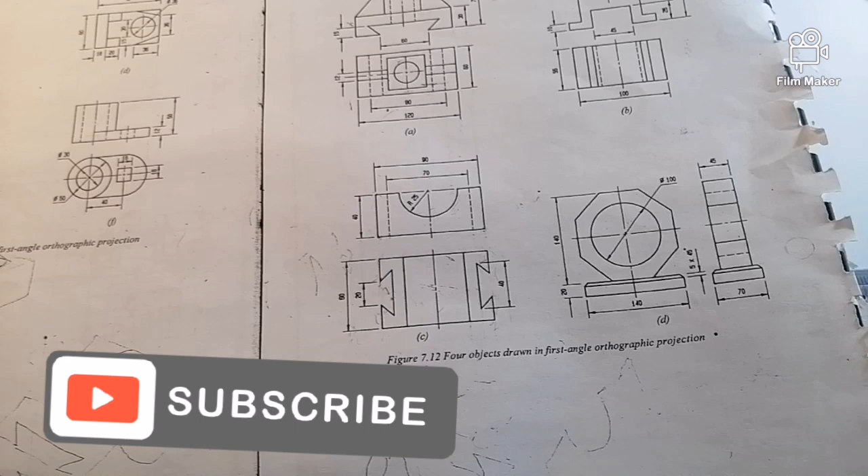Let us do D. Yesterday night we did C. So I think you understood. If you couldn't understand better, just let me know in the comments. So let's attempt it.

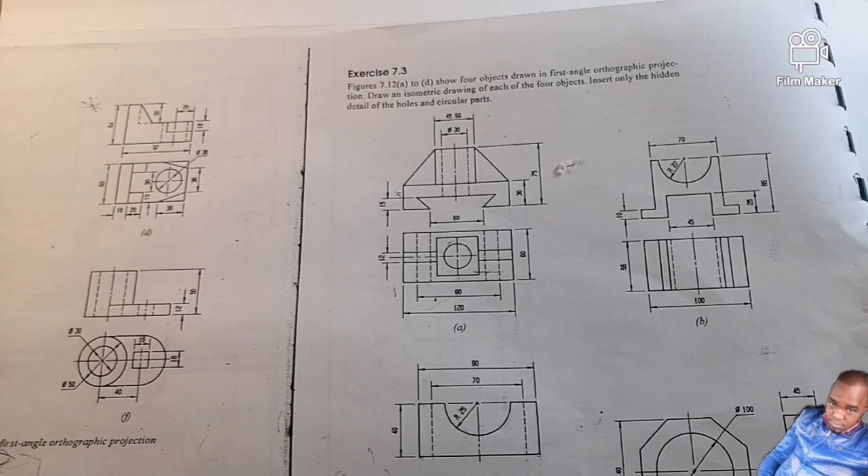So the question, I'm actually taking this right from the engineering textbook, Engineering Drawing N2 textbook. So we read the question. This is exercise 7.3. These views are given in first angle orthographic projection. So let us attempt D. So this is D.

Let's analyze the views. If they are given according to first angle orthographic projection, without fear or favor, we know this is front, this is left. What is not there is the top view, but using dimensions of the left view we can get the top view, because the left view and the top view always share the same width or breadth, and the front view and the top view always share the same length. Okay, let's go.

The very first step: draw a horizontal faint line without dimension. Then from there, draw a line that's going to be perpendicular. Remember, I said it's always advisable to start your isometric bottom down, so that you have enough space for your isometric this side. So here we go. You have to be careful.

Right. So the very first thing here, let's get the base. This is the base, and when you check, we can say this is a cup, like an athletic cup, because you must have a light on what you are drawing. Let's say this base is made of wood, then this one is made of diamond or gold. So now let's get the base.

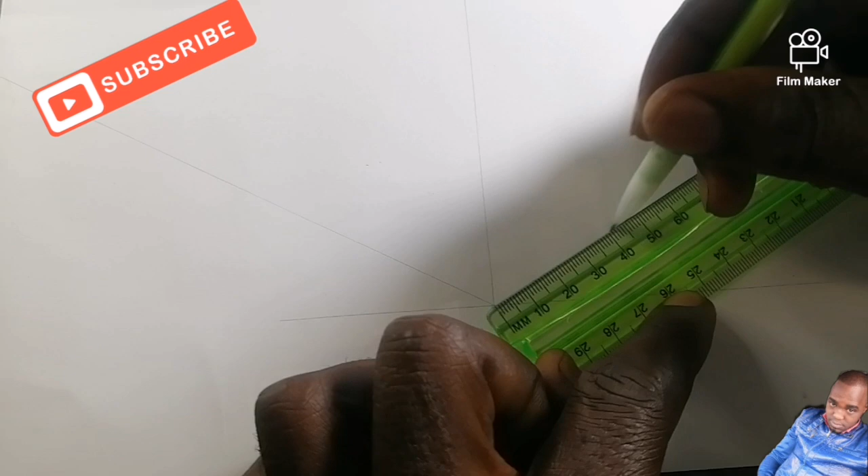From here till here is 140. Measure 140 from here. 140 is there, and you have to be careful. 140, you can draw it dark. Two lines are not allowed, so you must erase it. Understand? So let's erase that.

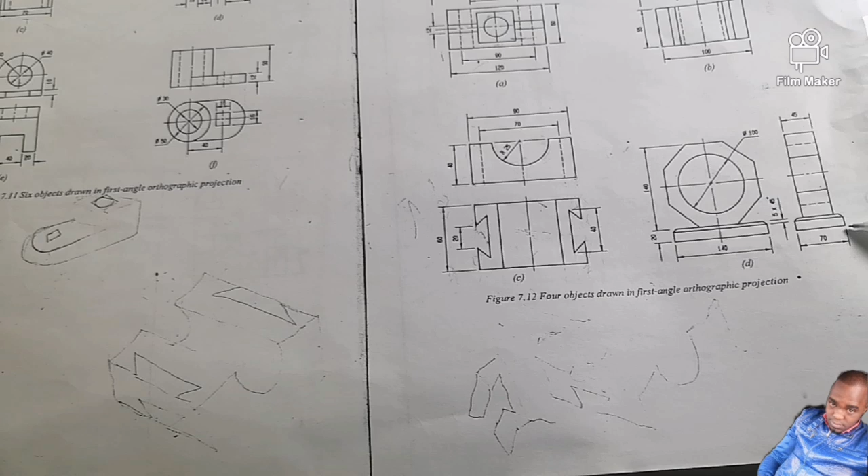After 140, get a line that is going up, faint, like this. I hope you see it. After the 140, let's come to our left view and get this 70. We said we are starting with the base of our cup. From there till there is 70, which means I am measuring 70 here.

70 from here till here. Where your 70 ends, go up faint. Then what is happening? After the 70, we have a height of 20 millimeters. So from there till there, measure 20 millimeters.

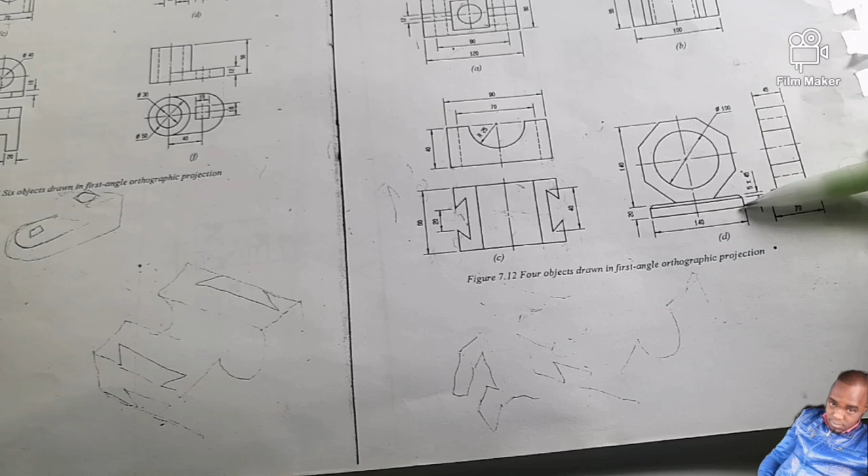There is our 20 ending, but double check. The 20 millimeters is from here till there. Then going back is 5 millimeters. So where your 20 ends, go back with 5 millimeters. Now from there, get a faint line for now, because you don't know what is happening there. Faint line like this. Are we together?

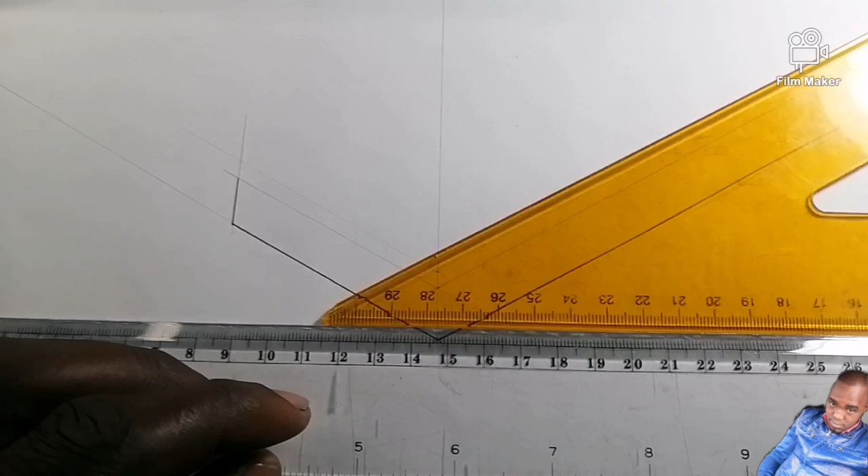Now I can draw this one solid or dark. Let me also get the constructional line where the 20 ends. Faint. Pull your pencil. Now this line I can erase; it's no longer helpful. Then let's close our base where the 5 ends. Remember, from here till here is 5 millimeters. There you go.

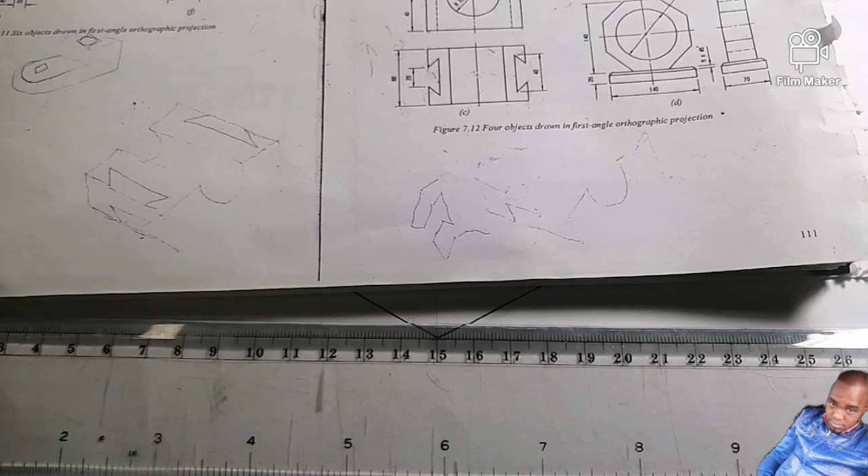Then what is happening? Come back here. From here till here we must use an angle of 45 degrees. Yes, from here till here is 5, but these lines are at an angle of 45 degrees. Bring your 45. Now draw a solid line from this corner to this one.

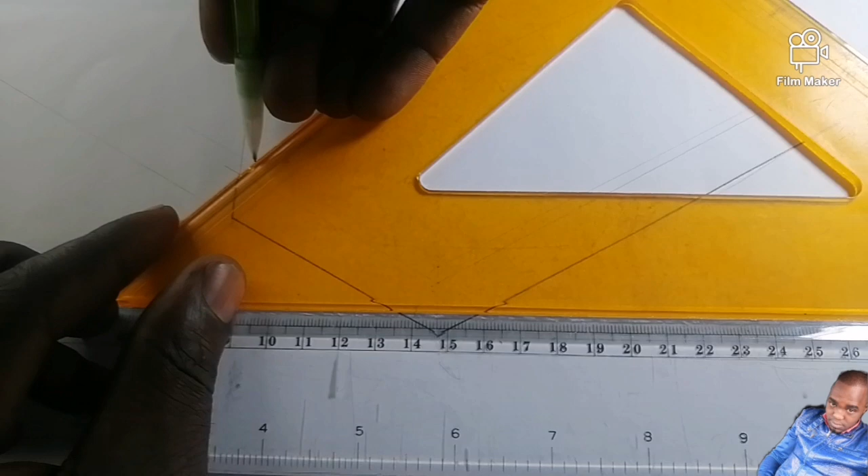Then from here to this one, like this. Then you're going to know what's going on from here. Now we can have a solid line here, solid line there, and solid line here.

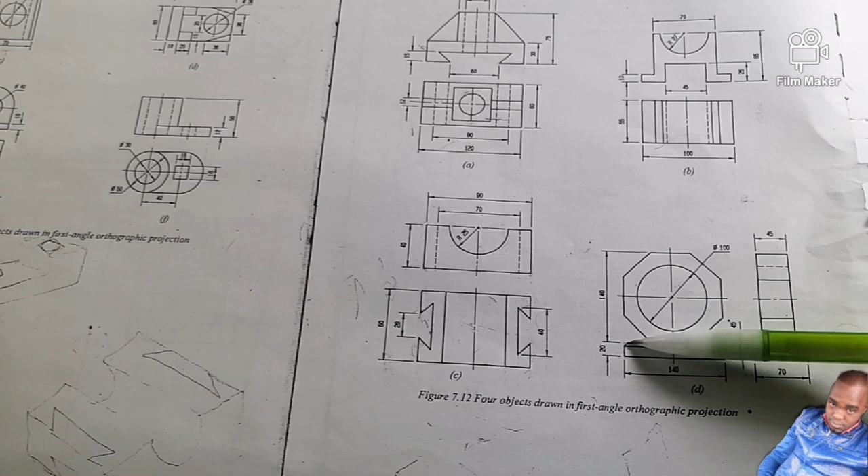Right, then from there, double check. When you are looking at your front view, you are having a line that is at an angle of 45. Again, double check on your front view as well as your left view. You are still having the very same line.

So that is why you are going to have something of this nature asymmetrically, because when you are viewing it at this direction, you're going to see something of this nature. Again, when you're viewing it at this direction, you're going to see something of this nature. So that is why it's like this.

So come back here again, solid. Right, so now we cannot draw this one dark yet, this one dark yet, because there is something that is happening here.

So now the very second step that we have to do, let's divide this length from here till the 140, divided by 2. Let's get to the center. 140, bring your calculators. 140 divided by 2 is 70. So 140, 0, there is my 70.

Then get the center of 70, which is the left view. Now remember 70 divided by 2. Bring your calculator back. 70 divided by 2 is 35. Mark at your center. 30, 35 center.

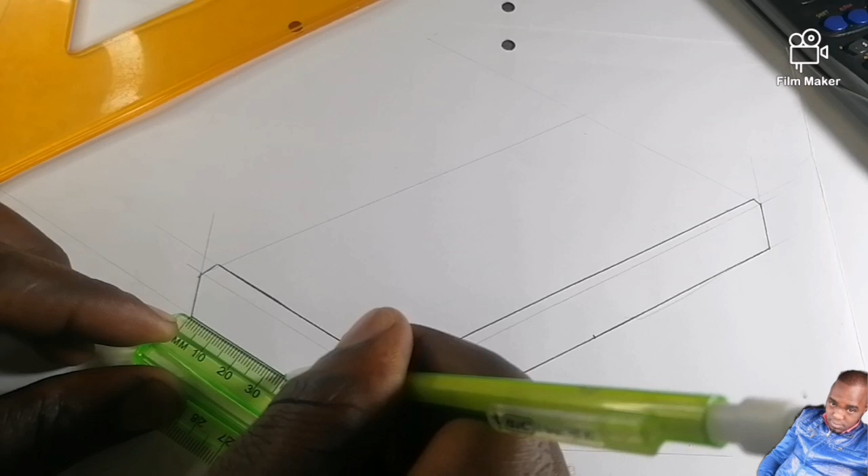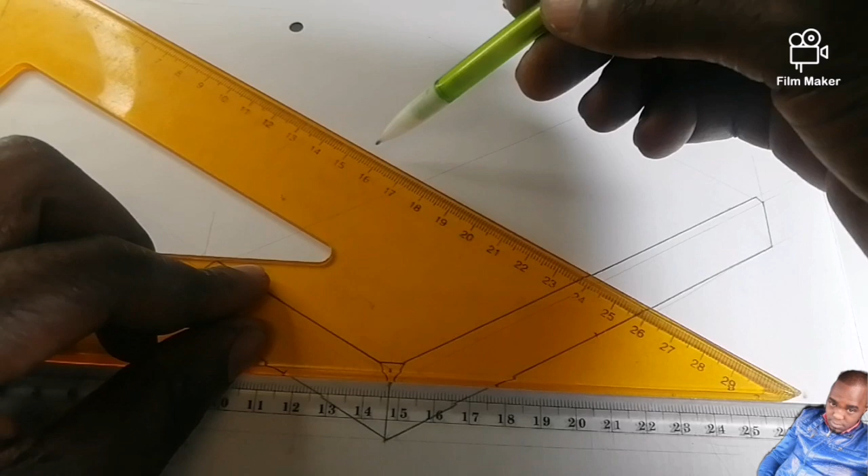There it is. After you've gotten your 70s, then construct them like this. This is your center. Then from there, right, so where your centers are bisecting each other, that's your point, that's the point you're supposed to measure your height from.

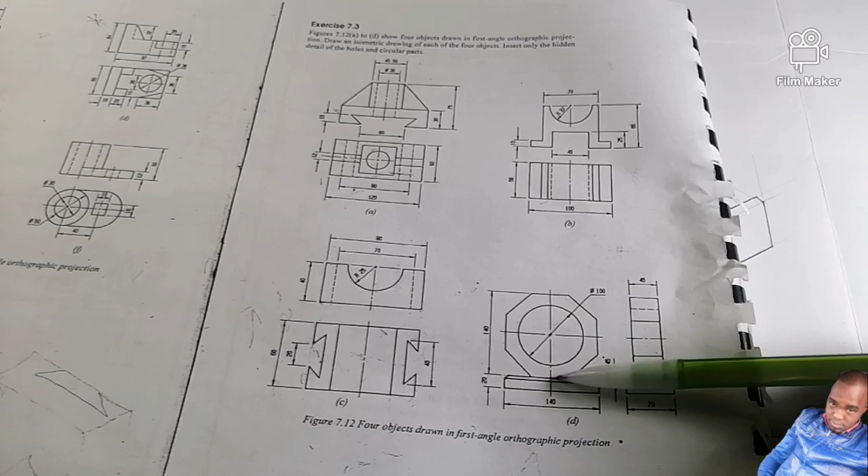Measure your height of what? Of 140, because they said from here going up is 140, from here going up is 140. And you see that what we're about to draw now is in the middle. We don't know the dimension from here till here. Again, we don't know the dimension from here till here. That is why we had to work with the centers.

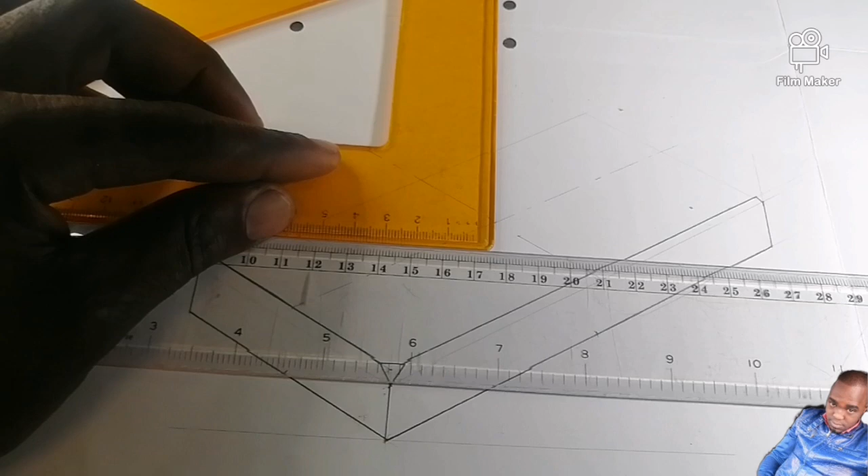So now from here going up, from here going up, we measure 140 vertically. Erase this one, it's no longer helpful. Vertically, faint, going up. Let me set my camera very well.

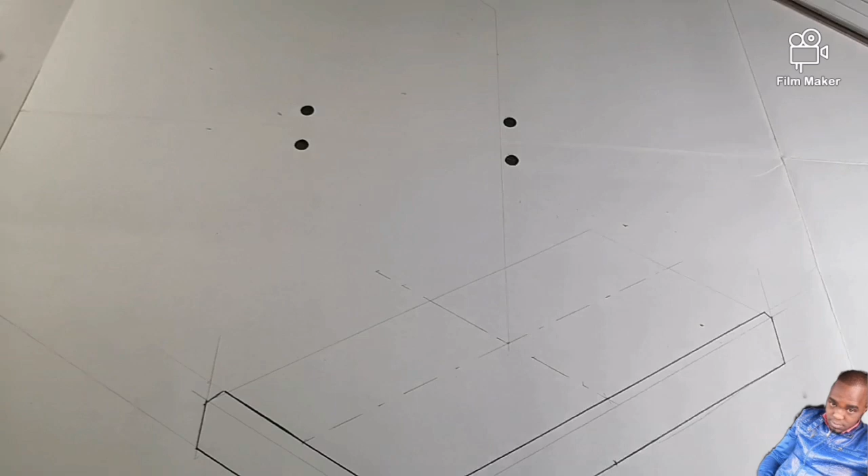Then after that, get 140. 140 from where? From here. My 140 is ending there, up there. So where my 140 ends, I must take these centers the way as they are. But now this point I'll pretend as if it's now this one. You understand? So this point I'll pretend as if it's now this one.

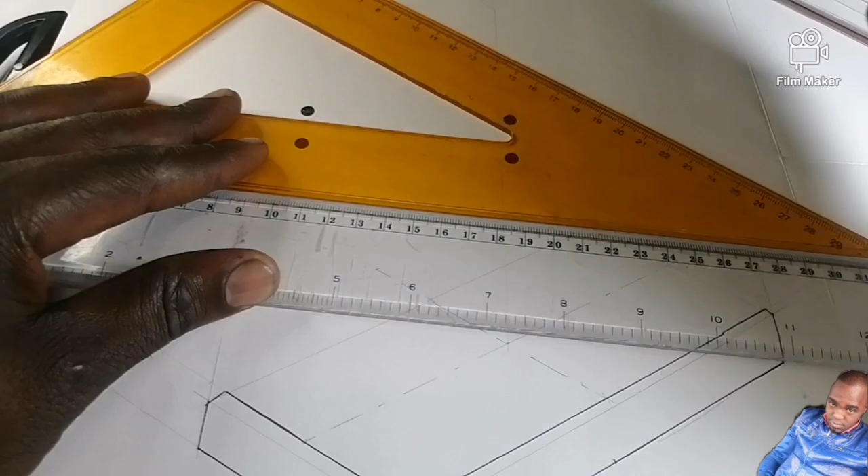So what I did here, I can now do it up there. Like this. Like this. And like this. This.

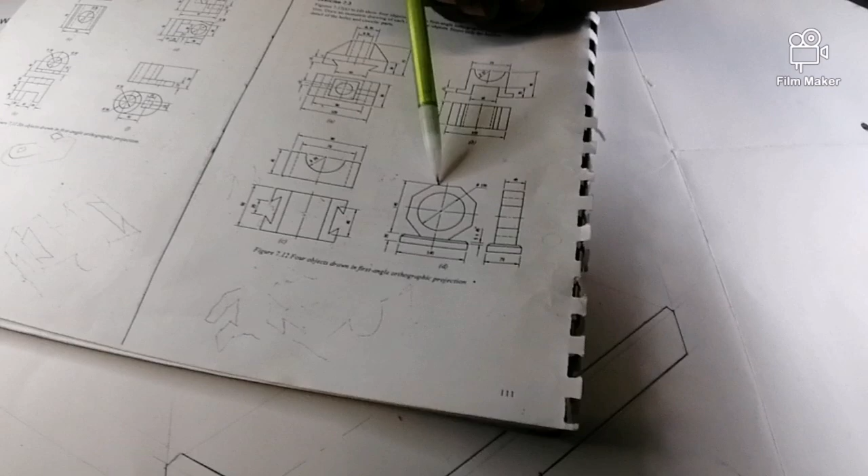Right, check this, guys. We've just measured 140 millimeter from here till there. Is what? Is 140 millimeter. So which means if I'm drawing a line like this, it's good as if it's this one, because from there till there is 140 millimeter.

So let's come back to our left view. So we've got the thickness of 45, which means you can come to say from here half of 45, from there till there, again from here till there half of 45, so that from there till there is 45. So bring back your calculator, even if it is a dimension that you know, but you must confirm: 45 divided by 2 is 22.5.

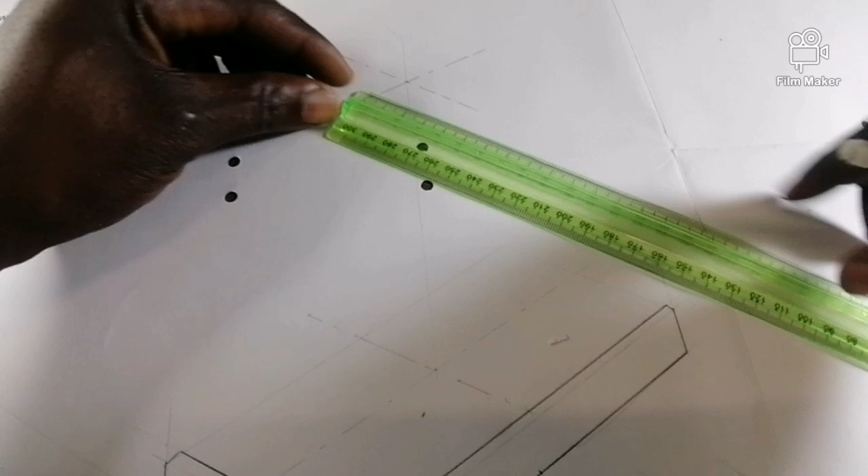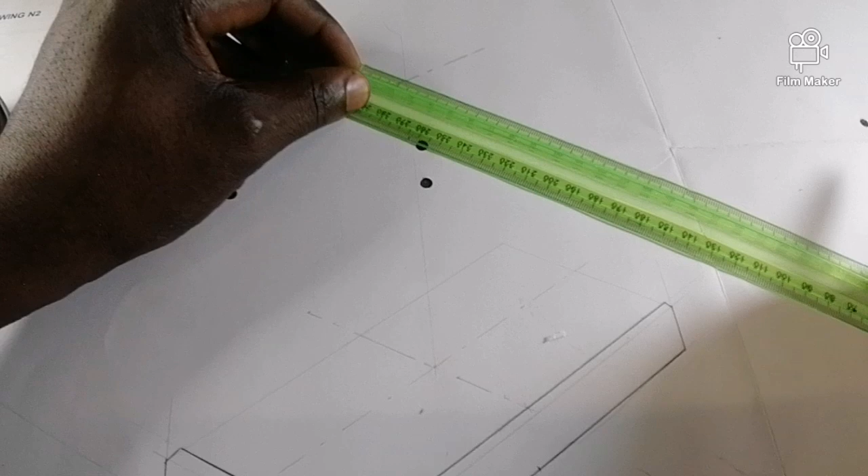So you come to say from there 20, 21, 22, the 0.5 is between 22 and 23. So 20, 22.5. Yes, 20, 21, 22.5 is here. Okay, which means from here till there is 45.

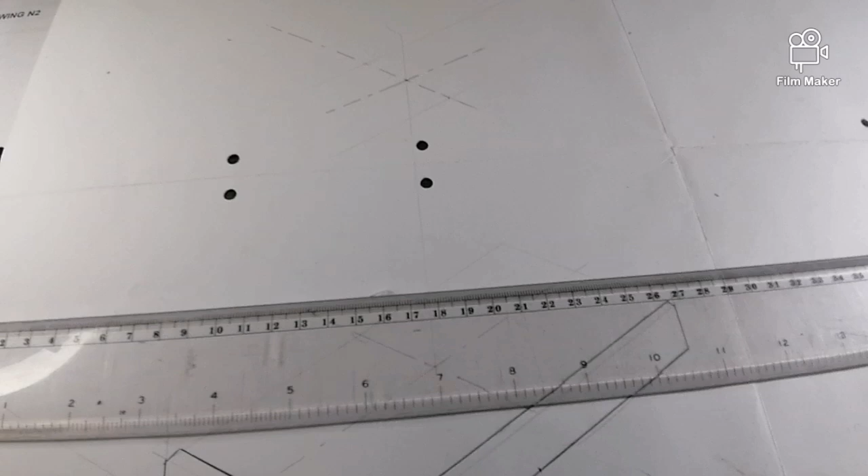Then what do you do? Where you've gotten this, get a faint line like this, isn't it? From here till there is what? It's a half of 45, which is 22.5. And again up there, faint. From here till there is what? Is 45. Come back to your question.

So by having this now, which means we are now having this vertical center. So now we don't know the dimension from here till there. Again, from there till there we don't know. But we know this is an octagon. It's not a hexagon, it's an octagon. So you must know how do you draw an octagon.

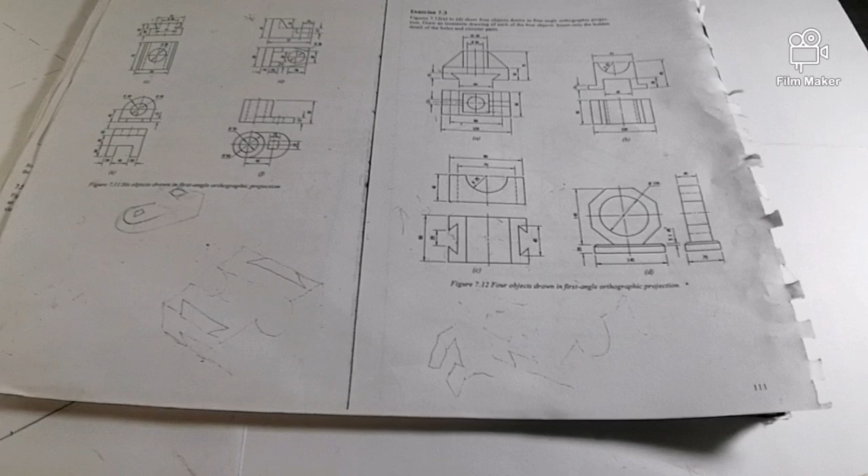So then from there, what do we do? Guys, we are having an octagon. Octagon means 8 corners: 1, 2, 3, 4, 5, 6, 7, 8. It has got 8 corners. Hexagon has got 6 corners. So let's remind each other, how do we draw an octagon?

And it is very necessary. We'll draw an octagon here, and then from there we take the dimension into our drawing there. So the height of our octagon is supposed to be 140, isn't it? So let's get the center of 140. 140 divided by 2 is 70. So take your drawing compass, then open it to 70.

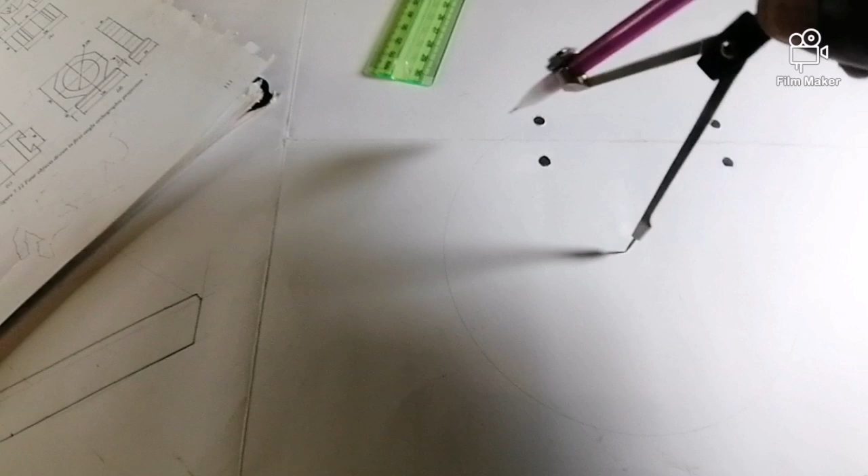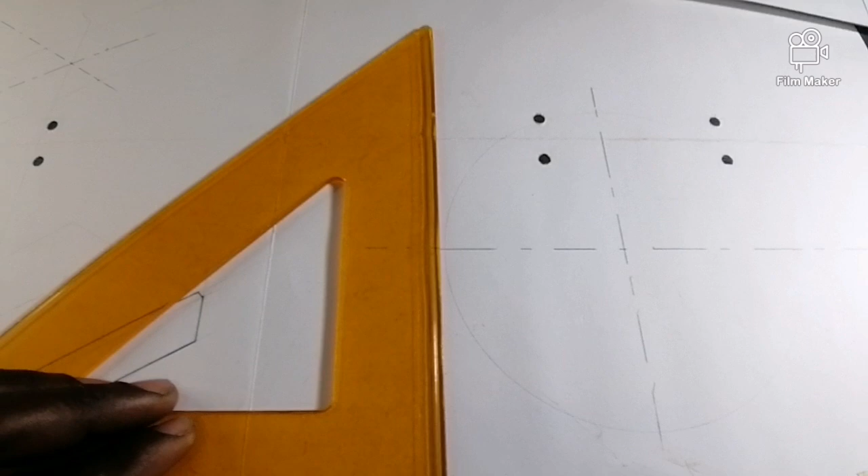70. Then from there draw a circle, faint. I hope you see my faint line, because I normally draw during the night, because that's when I'm having time. Then from there you draw a horizontal center line. Where were you placing your compass? Draw a horizontal center line. Draw another one that is perpendicular, a vertical center line. Then from there draw a faint line that's gonna be like this here.

Draw it vertical so that it will just touch the circumference of your circle. Again, from here draw another one down here, that it must just touch. In mathematics class we call this type of line a tangent. It's just touching the circumference of the circle.

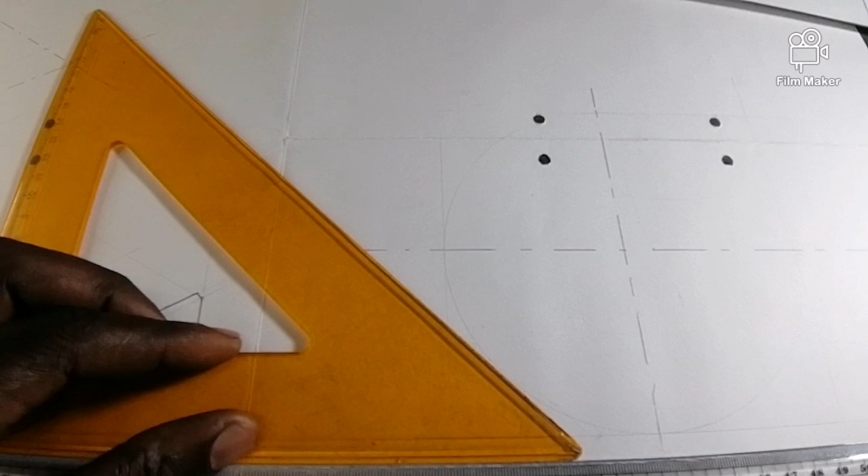It's not crossing, so again up here it must just touch. Then from there take your 45 degree set square, because we draw an octagon using 45 degrees. Draw a line that's gonna behave like this. Now you draw from here till here, then you stop there. Then again push it up till here.

There we go, this one is parallel to this one. You see, this line as well is also touching the circumference. So again, up here, down here actually, here we go. Then push it, just touching the circumference of the circle outside, not inside. So this is what we have.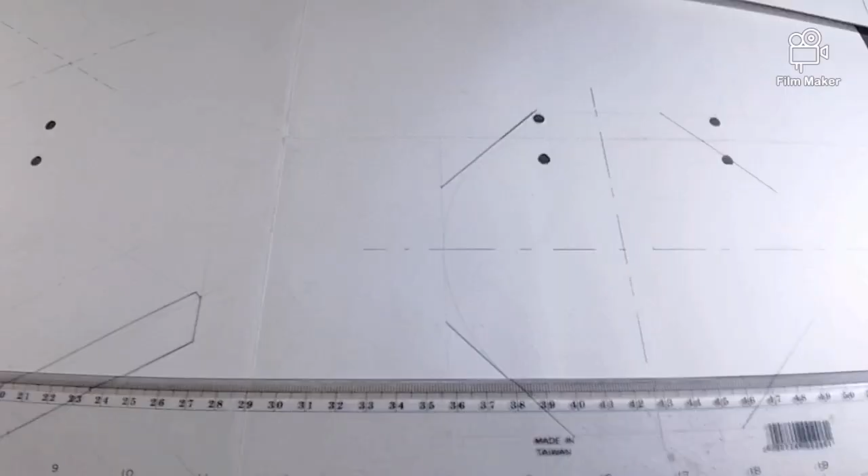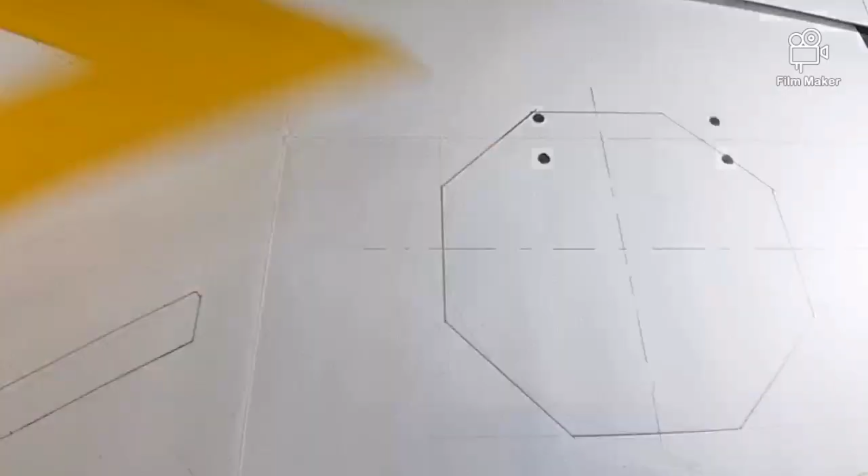Then now you can come back to draw dark here, draw dark here, draw dark here. So this is actually necessary even in the final examination or in the classwork. Perhaps your teacher has given you this one. This is part of the drawing, it has to be there.

Do you see that it seems to be missing a dimension from here till here? We didn't know how much it is. From here till here we didn't know, from there till here we didn't know. We were just told you must use angle 45 set square, isn't it? And the height from there till there is 140 millimeters, which is this one from there till there. You see now the dimension we can get.

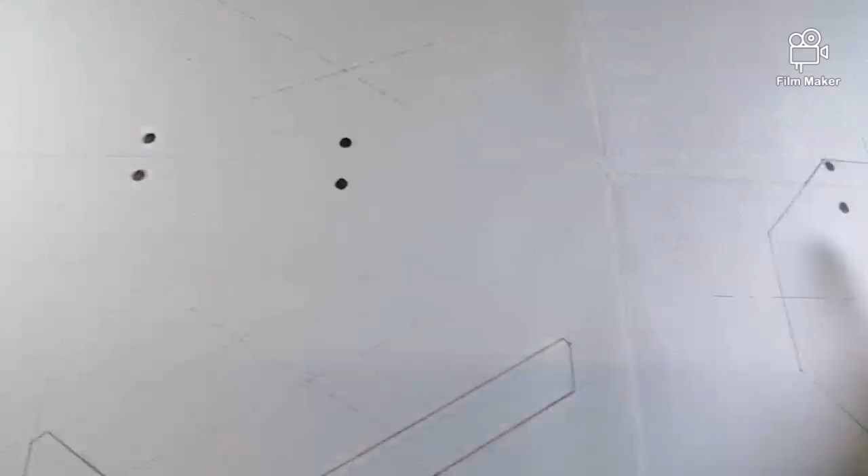And this point is which one? Come, is this one. Are we together? So which means now I can place my divider or drawing compass from here till there, so that I come and measure it from there till there, again from here till there, and from there till there.

Let's do it. Take your drawing compass, record this. Then come to your drawing, mark here and mark there. Are we together? Not on the inner one, but on the outer one.

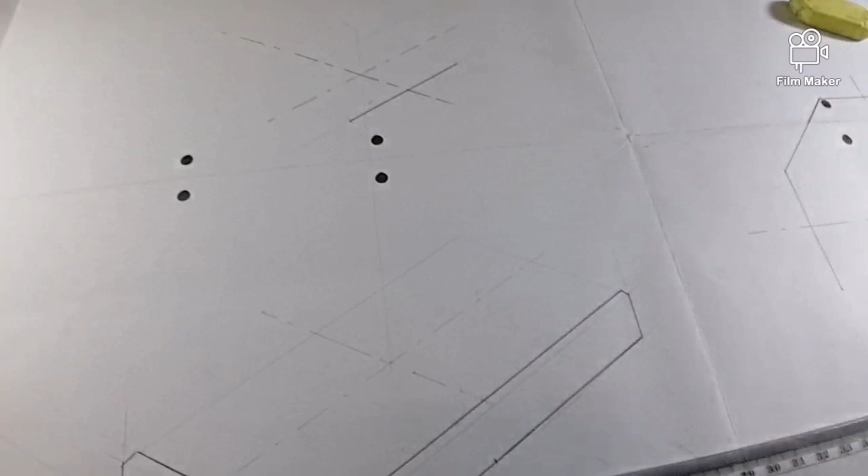Then from there, without fear or favor, I know from here till here is now dark. From here till here is actually this point. From here till here, this point is this one. This one is that one. Are we together?

So now, without fear or favor, I will know from here till here solid. From here till here solid is that thickness of 45. Check it with our left view. From here till here is 45. What is this one? From there till there. And again here, dark.

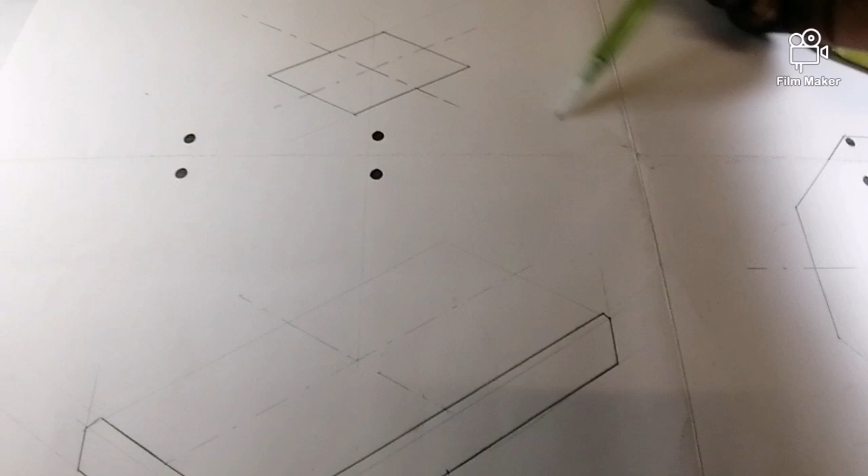So now to get this one, it will go like this and like this, isn't it? So how do we get rid of that? Get a vertical faint line from this point, going down, which means I'm moving from here till there. Let me get rid of it.

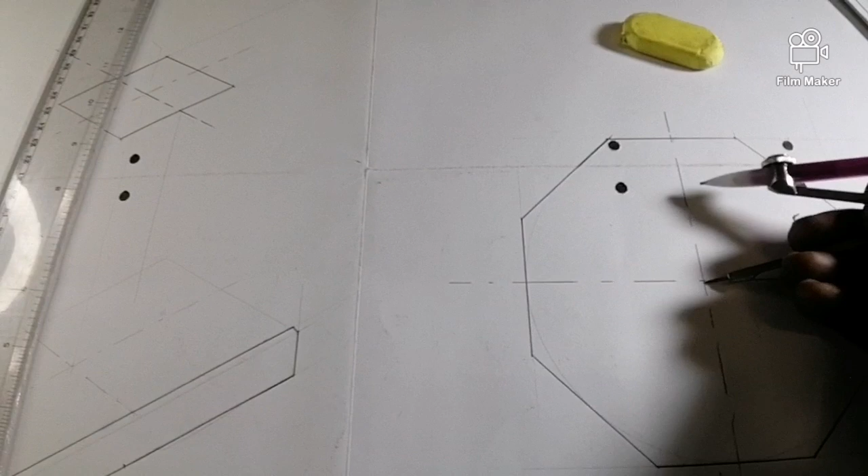How much is that one? Record it with your divider or drawing compass. There we go. Like this to the center till there, and then from there, without shifting your compass, come here. There is the center, so I can then draw the horizontal center there.

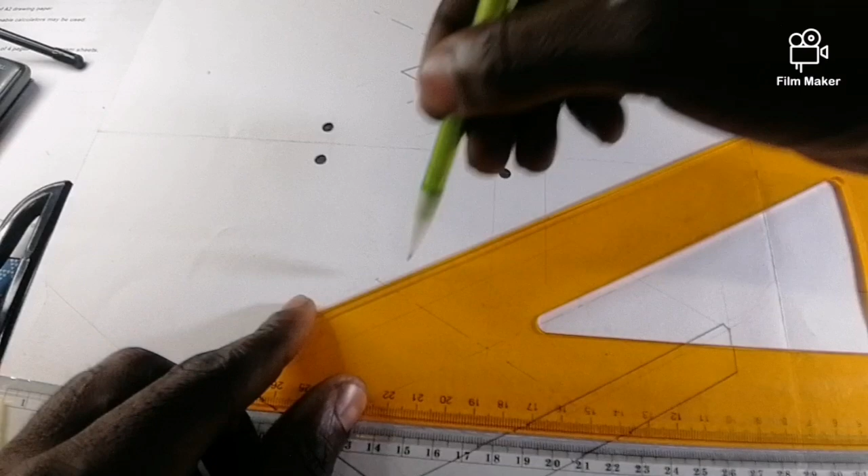Remember, a center you must always draw as a faint line. Yeah, it's a center as well. So which center is this one? This one here is this one. In our given view is this one.

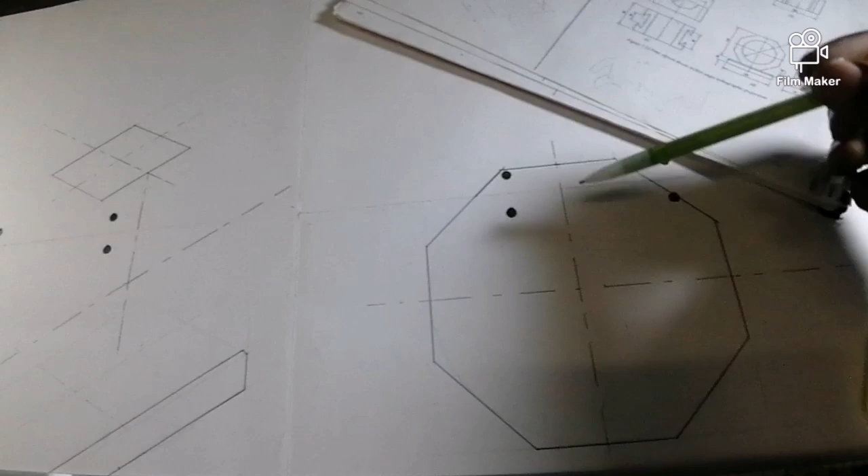Then the vertical one is this one. Here is this one. In our given view is which one? Is this one. Then this center has to be taken till down there. So this is a center, mark till here again, which means this center must go down till there.

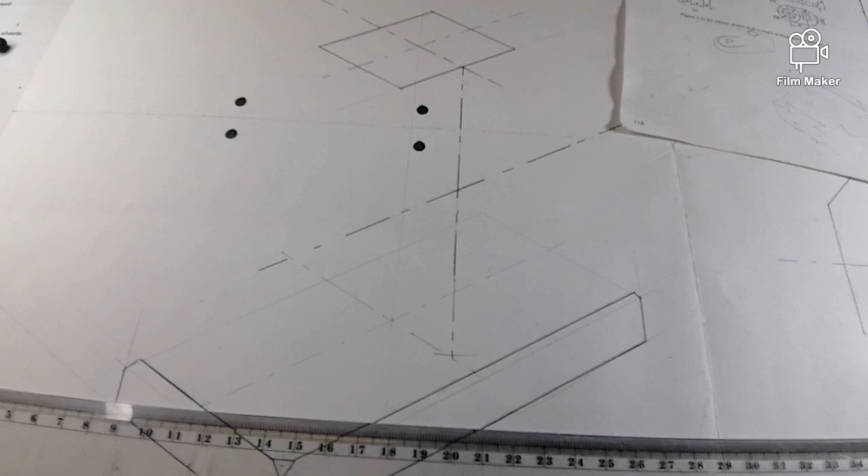Then it's simple, guys. After you've drawn it like this way, you just take the dimension from here till there. You see now what is happening from here till here. I just record it here, I come and put it here from there till there. Then from there I use my 30 degree ruler from here till there, because this one is at an angle of 30 degrees, but this one is just straight looking at you.

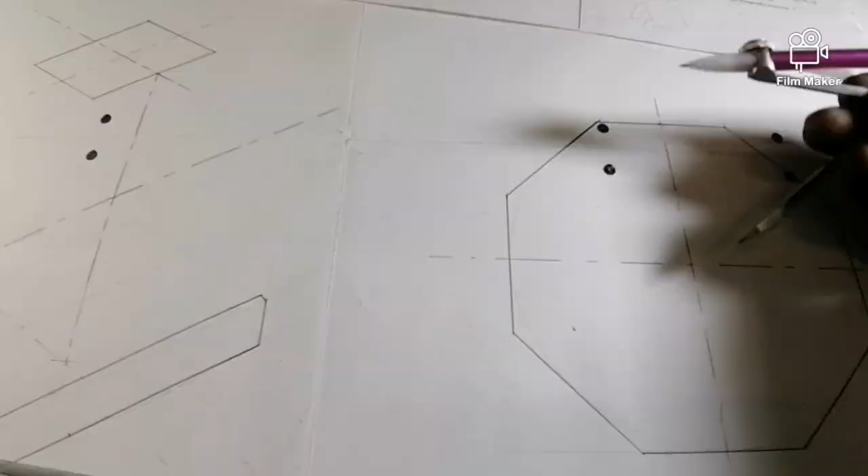You understand? So let's do it. Remember, this point is the center. Place your compass here, further extend it till there. This is it, isn't it? Then come to your drawing, mark here and mark here. You understand?

So let me get an exact point here. There is my point. Then what is happening with these points? Which means I'll get a vertical faint line going up in this direction and a vertical faint line going up in this direction. Let's do it.

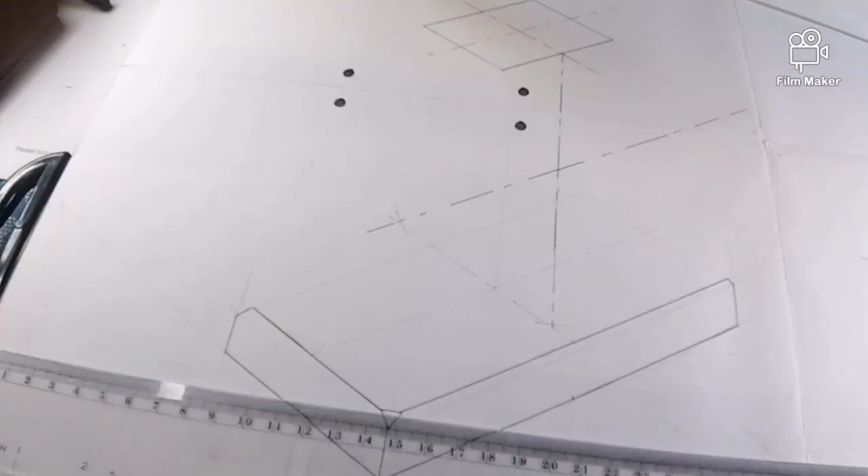Then what do you know? What are the properties of an octagon? All the sides, they must be what? They must be equal. If from here till here is 50, which means 50, 50, 50, 50, isn't it?

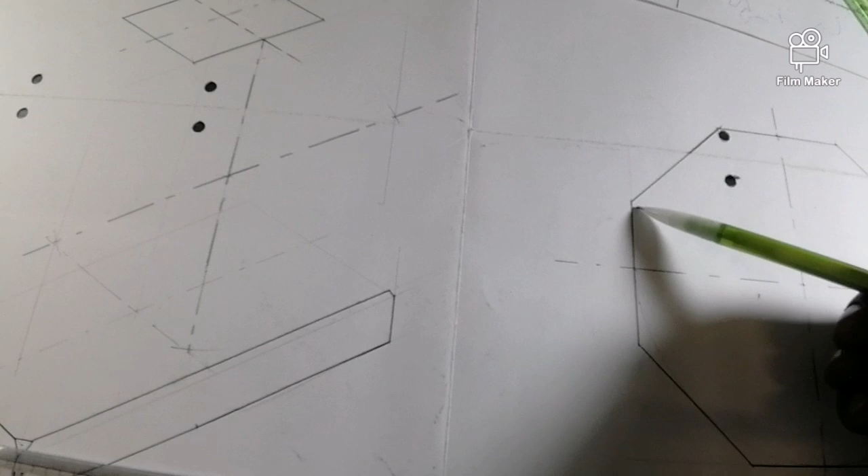So which means now, come back here. This point is now this one, isn't it? So which means I must move out up, from there till there, and from here till here down, which means I must do the very same thing even up here, from here till here, and from there till there.

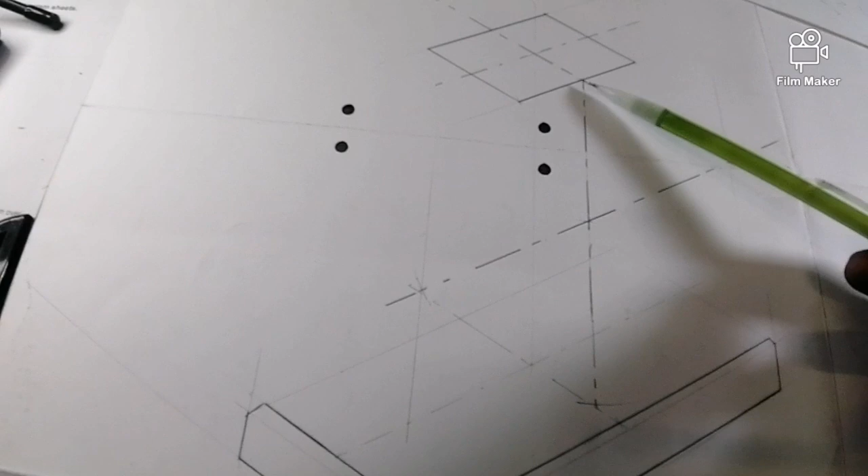You understand? So since we understand that all these sides must be equal, we won't be taking them here for the matter of saving time, isn't it? It's what we have there already. So we'll just get them right from here.

Place your compass here till here, further extend till here, then come place it to where you got in this point, mark here and mark there. Even this side, place it here, mark here and mark there. Then from there, take your ruler, draw it solid or dark.

Then from there, in this side, then from there, you go.

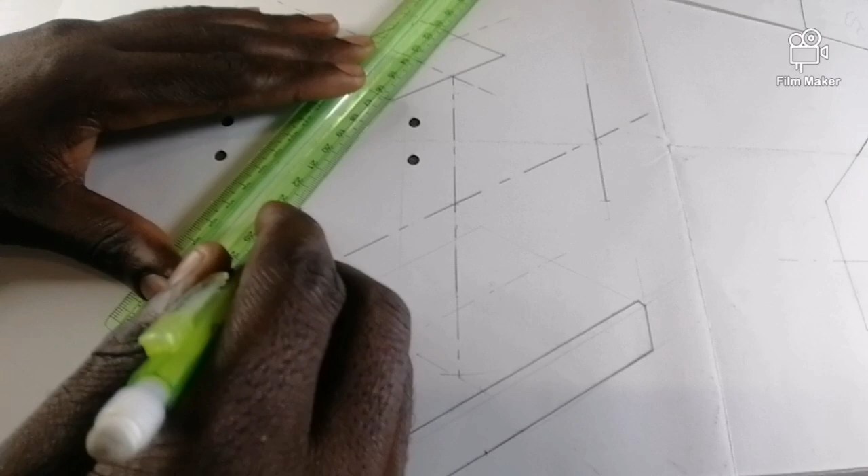Remember, how did you draw this one? We draw it using our vertical component direction. They must be vertical to each other. This, you see, this, you see. Then now, without fear or favor, you'll know, okay, this line will go from there till there.

Dark. Just like this. Now,

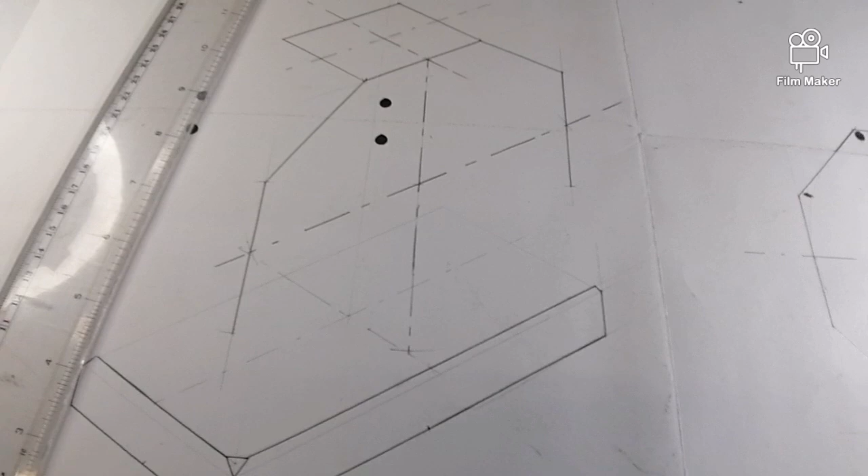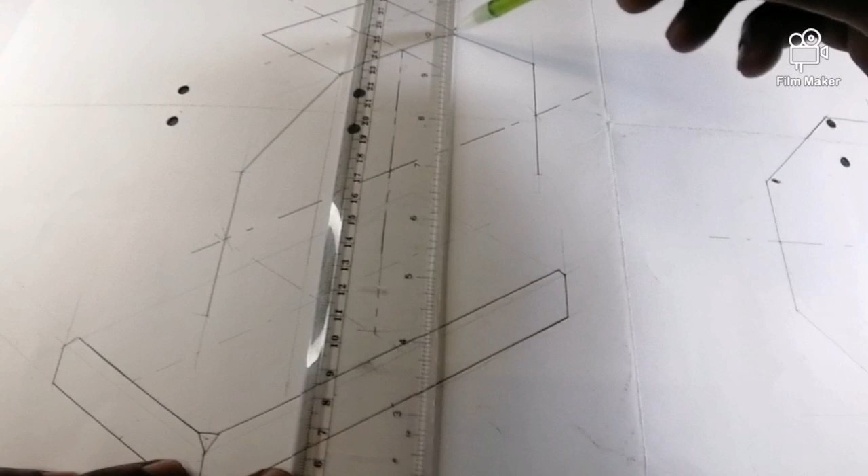Again, what is happening? Take these points down like this. Again, this one. Down like this. After you've took them,

you are going to have a solid line that's gonna start from here till here. That will correspond with this one, and this one is which one? Is this one. Everyone, is this one.

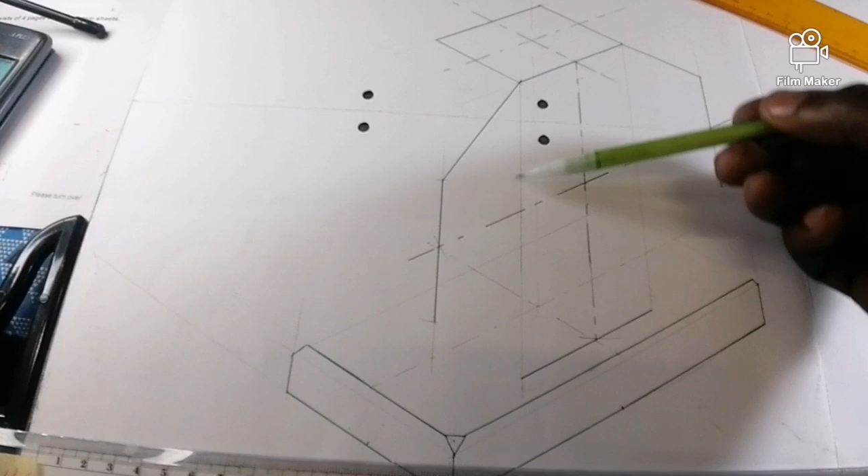Remember that this point is in line with this one. This one is in line with this one. That is why we just took this faint line going down like this, going down like this. Then after you've gotten this, then you just take your 30cm ruler.

You join this point with this one, this one, with this one. Then after that, take this line, this direction. Faint. It will go like this, faint, and this one again.

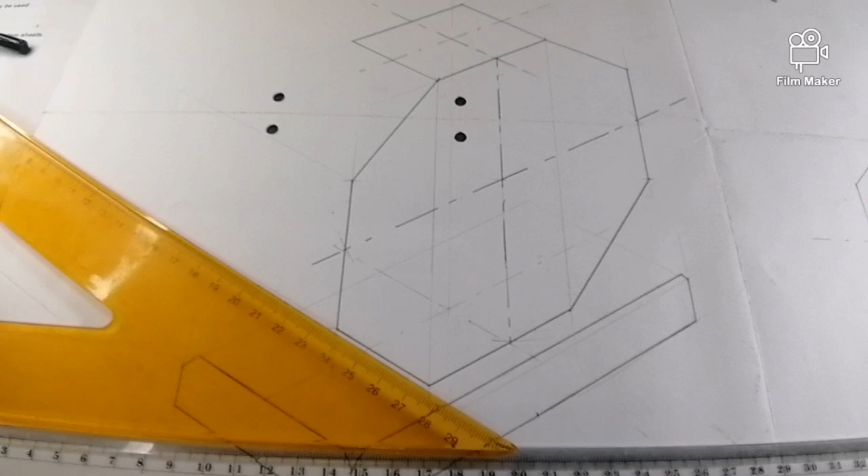Faint. How was the thickness? You don't even have to go back to measure it. Just retrieve it right from here. This is it. Then from there, you can get a dark line

like this, which means without fear or favor, I'll know here is now solid. Again here, solid, my 30cm ruler, solid.

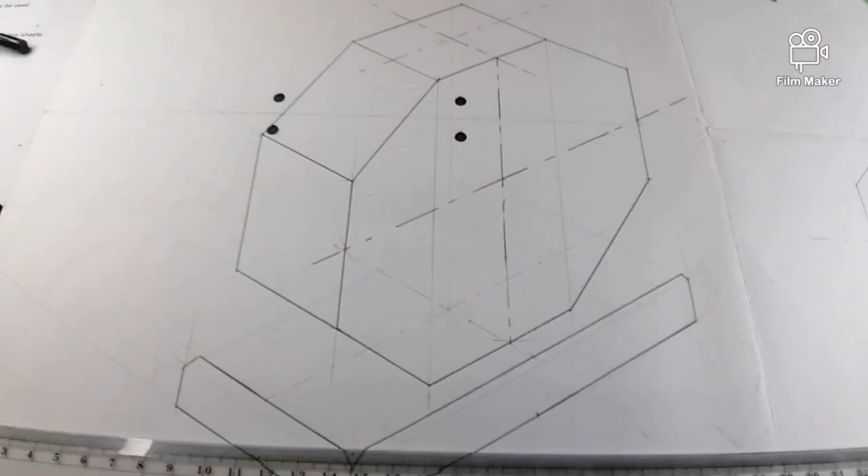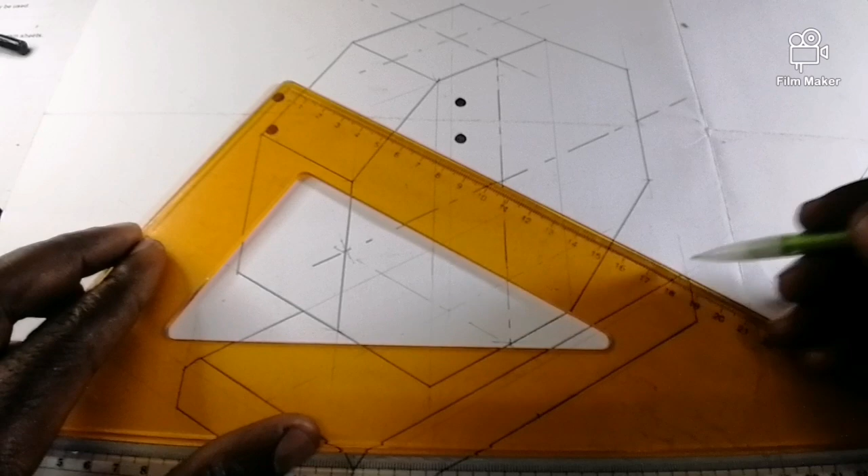So which means now what's going to happen, now I can draw this line, solid here, and this one solid here. Like this we go.

Like this we go. So then remember we are having a what? A hole here, a hole here. So that becomes simple for us then.

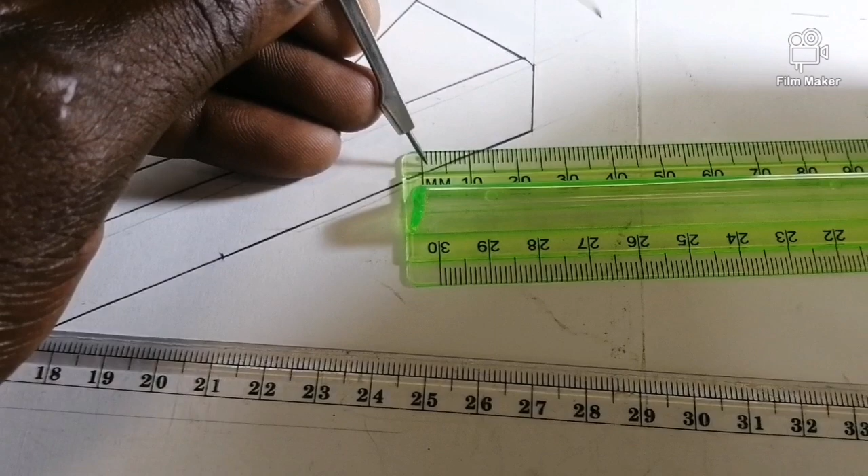So let's do it. Check it, that hole they are saying is diameter 100. Diameter 100. So diameter 100 divided by 2 to get the radius, isn't it? Is 100 is how much? Is 50. So take your 30cm ruler, get 50.

There is your 50. What do you do with that 50? Come back to your drawing, then place it by the center. This is your center. Mark here 50, mark there 50, mark here 50, mark there 50.

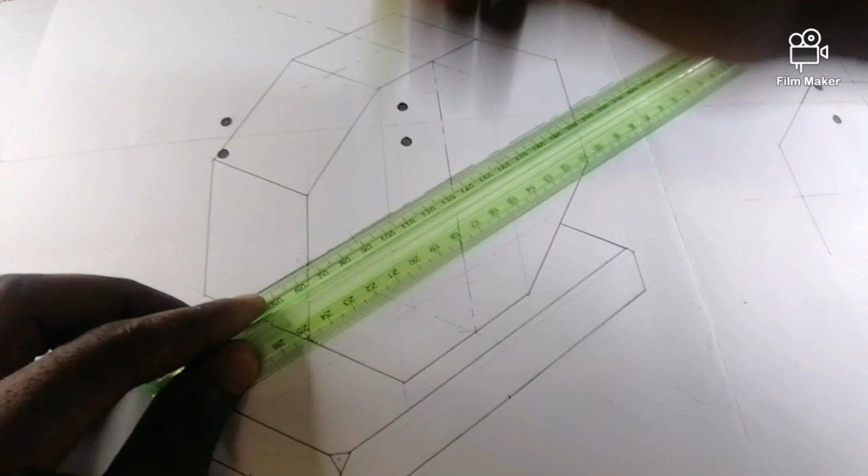So if you've gotten such kind of marks, please get the exact mark. Then from there, T-square against the drawing board, set square against your T-square. Get a faint line that's gonna be like this, passing the mark that you've just got, isn't it?

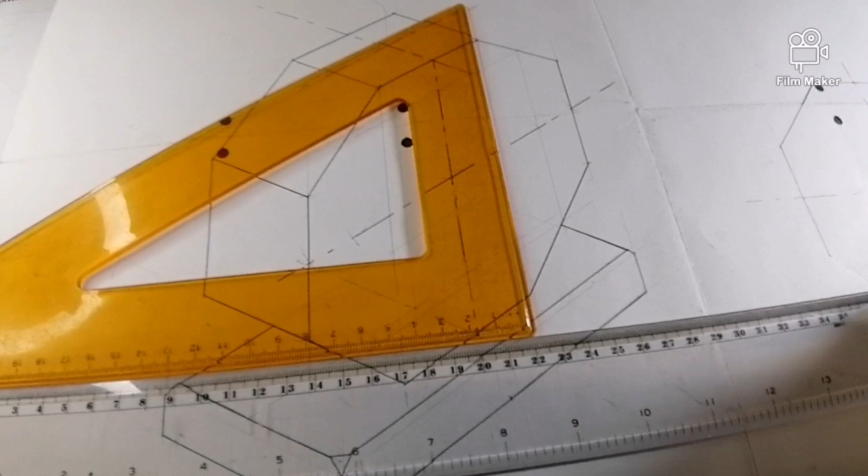Up there again, we are creating a box binder method. There it goes. So just scroll down, guys. In case you don't understand this method, I've got some other videos where I'm explaining this method as well, where maybe you can understand it better.

There are less lines compared to this one. Again, you get a vertical one. So come back to this one, further extended, because we must get a point there, which is this one, even up there, which is this one. So remember, we open our compass to 50mm, which was the radius of what?

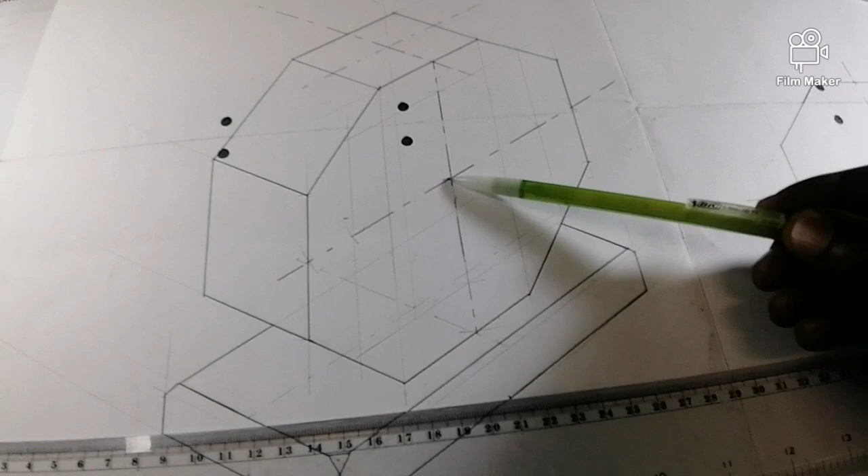Of 100, isn't it? So which means from here till there is 50, from there till there is 50, from there till there is 50, from there till there is 50, right? Then we drew vertical lines in those marks of ours.

We drew lines, I will say, at an angle of 30 or horizontal, so that we get this point and point and point and point. That's give us what? 4 points. Maybe I can say 0, 1, 2, 3, back to 4. All together.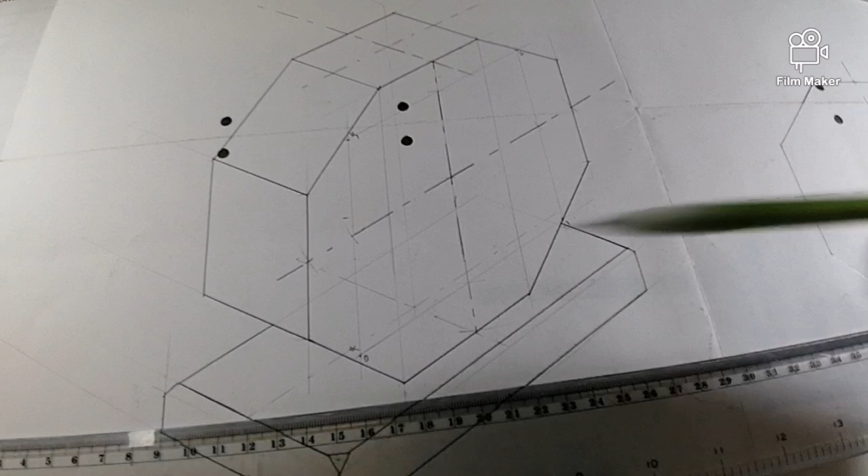So we will then have to join the two longest opposite corners. Two longest opposite corners. We've got 4 points, right? That they are giving us a square, and in between of these corners we've got a center. Corner 0 and 1, there is a center.

Corner 1 and corner 2, there is a center. Corner 2 and 3, there is a center. 3 back to 0, there is a center. Are we together? So maybe I can say this is my A, this is my B, this is my C,

this is my D. Are we together? So the number points are corners. The alphabetic points are centers. Are we together?

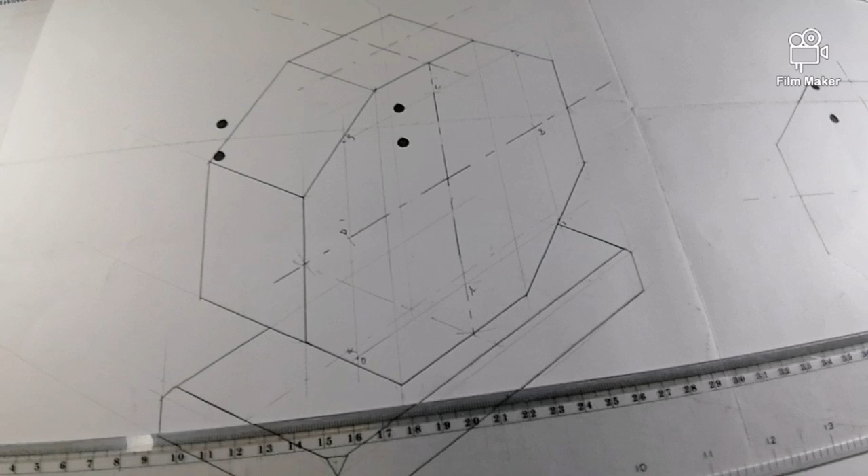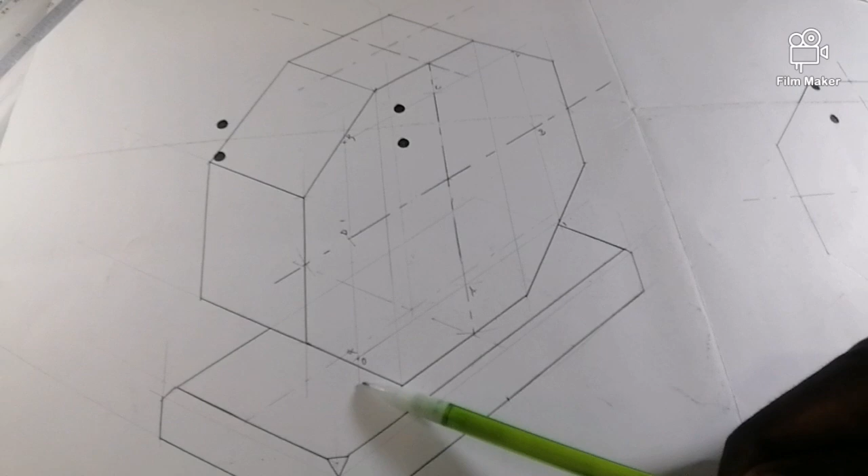So the law will then say join the two longest opposite corners, and those two longest opposite corners are numbers. So we've got 0 and 2, which are opposite to each other. I cannot say 0 and 1 are opposite to each other. They are not opposite to each other, but they are in the same line. They are in line with each other, isn't it? And 0 and 3, they are not in the same line. But 0 and 2, they are opposite to each other.

1 and 3, they are opposite to each other again. But then 1 and 3, of course they are opposite to each other, but they are not as far as compared to 0 and 2. So if they are saying join the two longest opposite corners, which means I will place my ruler at 0 to 2. And this line has to pass the center point. Are we together? We've joined faint. Remember that we want to draw an arc.

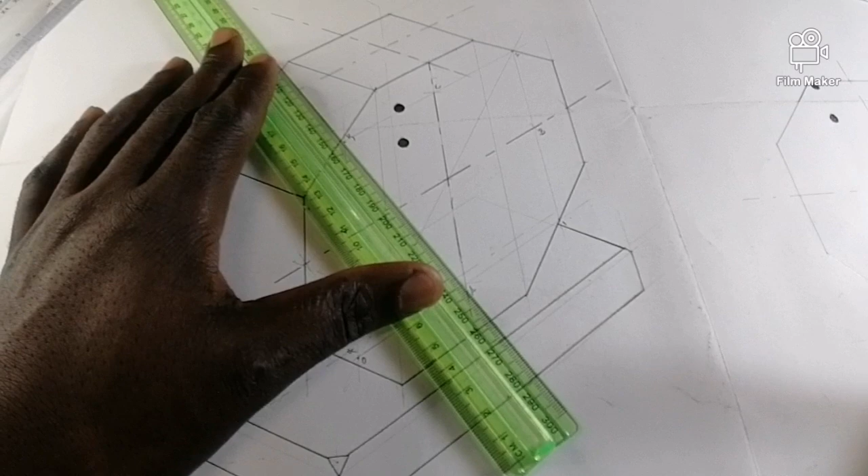A diameter 100. Then from there, join corner to center, center to corner, which means now I'll be joining a number point with an alphabet point. The centers were named alphabetically, and corners were named in numbering. So if they're saying join corner to center, center to corner, it's going to be corner 3 with the center A. There we go. And center C with corner 1.

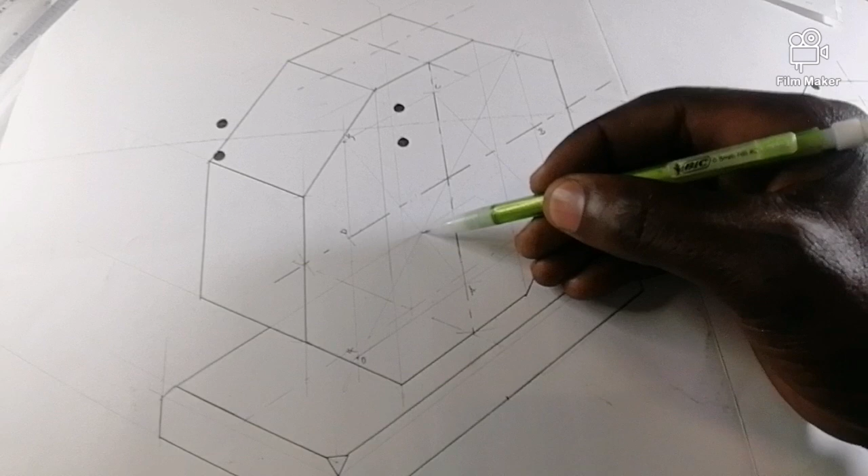There we go. It's not clear. Let it be clear, as when they were saying let there be light. So even here, let it be clear. So the time we're joining corner to center, center to corner, the line of the two longest opposite corners was cut. So where it was cut, we are getting a point. There is a point. Maybe we can say it's Roman figure 1. Again, there is a point when we're joining C and 1. It's Roman figure 2.

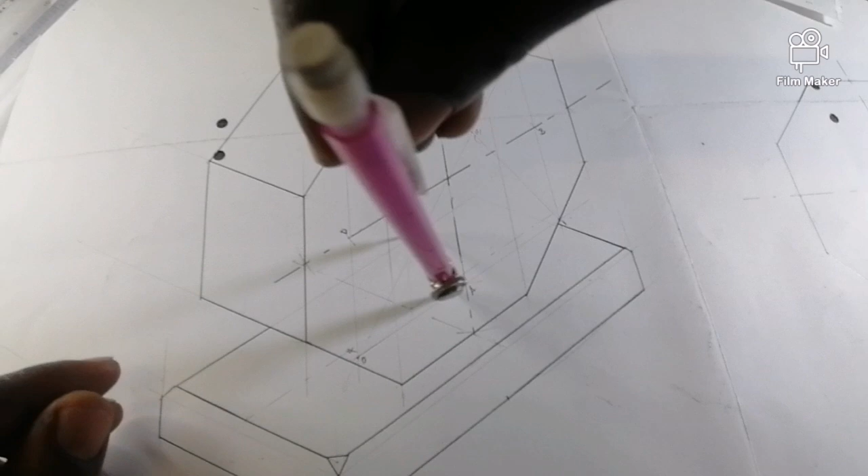There is our point. So place your compass at Roman figure 1. Further extend to D, which is your center. Draw a line that will strike an arc that will start from D to A, or from A to D. Draw it dark like this. Again, go up to Roman figure 2. Place it at Roman figure 2. Further extend to C, C and B, or B to C. Still one and the same thing. Draw it dark.

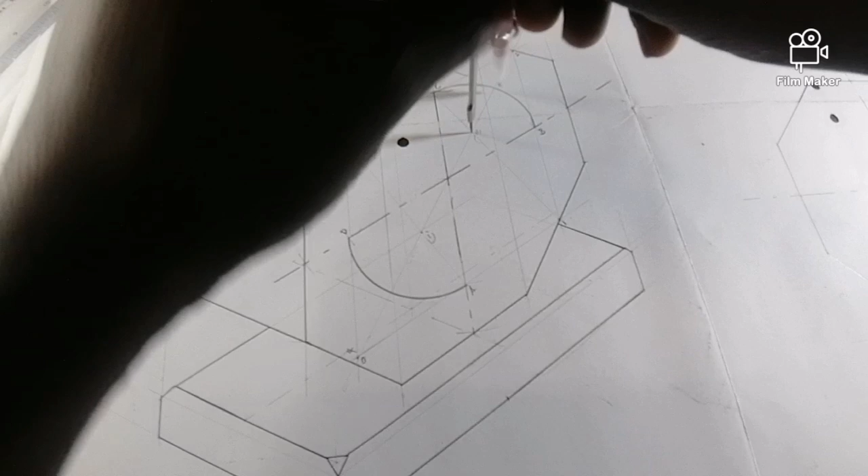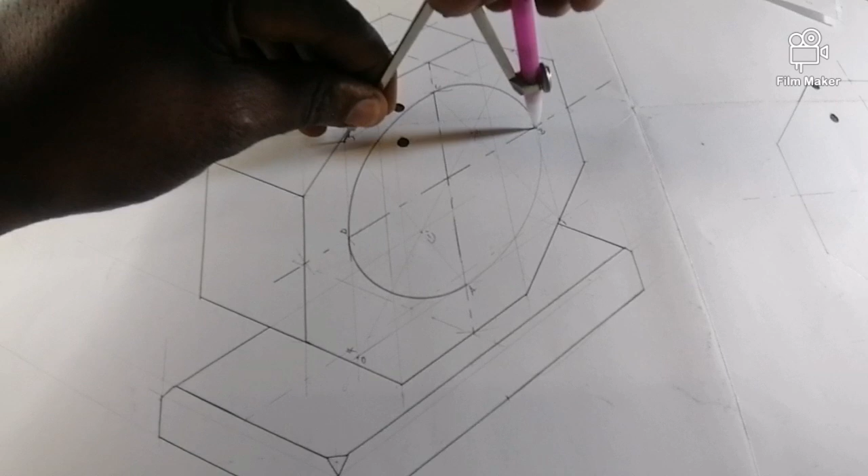This edge, you have to be careful. Place it here, further extend till there. There you go. Like this. Then to close this side, place your compass at point 1. Further extend to C or to D, like this. There you go. Dark. Then to close it down here, place your compass at what? At point 3. Further extend to A or to B. Dark. As my compass is failing me. It's like this.

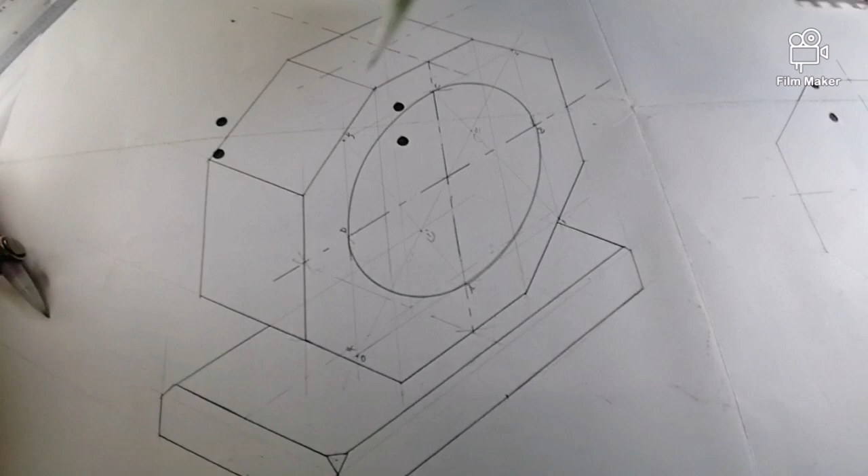Then we draw the hole of diameter 100. So let's check, are we going to have the very last line there? Because this is a hole throughout. Who's telling us that? The dimension, hidden details in our left view. Because they are saying starting from here till here, which means this hole is throughout this upper part. So how are we going to get that? We are going to get a line that's going to behave like this from point D, faint like this, and again from point A like this.

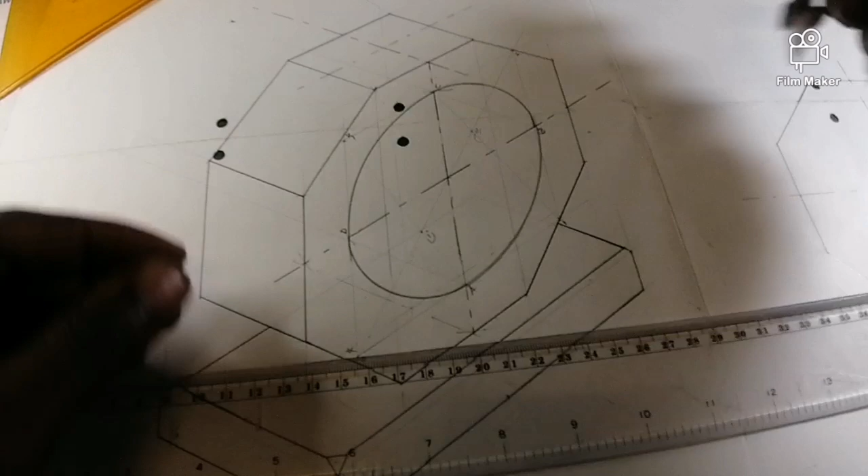Then now you come to your thickness. Even before your thickness, you must firstly get a line. Where were you placing your compass the time you drew this line, A to B? You were placing your compass at point 3, isn't it? Take this point 3, clip it back with the same thickness. So which means come here, record this. Right? Then come and place it here, which means I must be placing my compass there. Are we together?

So how? Like this, come back. Where were you placing your compass the time you drew this line? I was placing my compass at this point, which is point 3. I drew it like this, isn't it? Now, take it back to that point that you just got, which means you must start your arc where? From here till there. So draw it dark. So come and redraw it, make it dark.

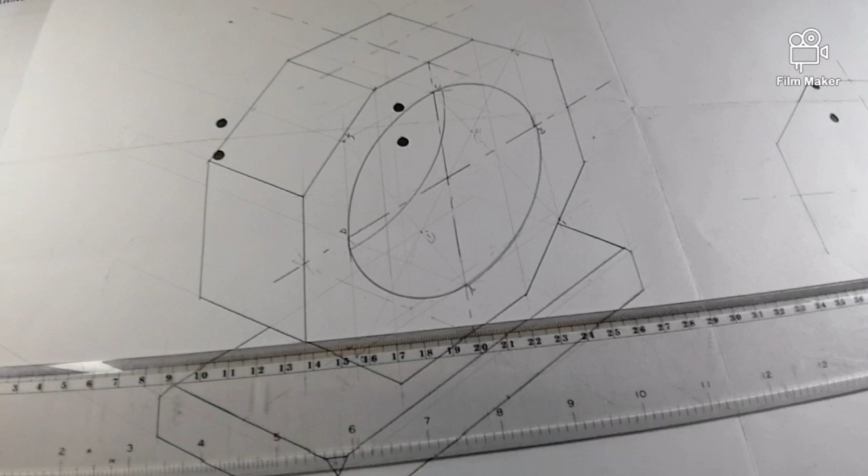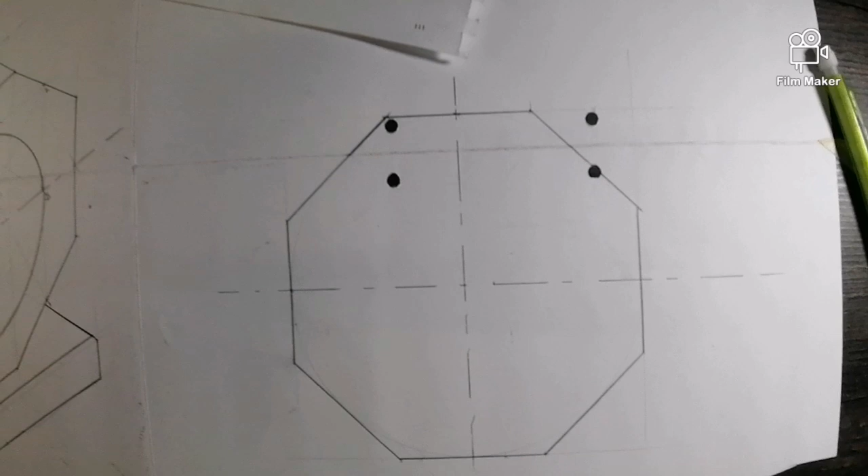So that was engineering drawing N2. So we actually started here. This was the question that was given. This is it, like this. Then from there we came here for the dimension of the octagon. From the octagon, then we came here. This is the solution.